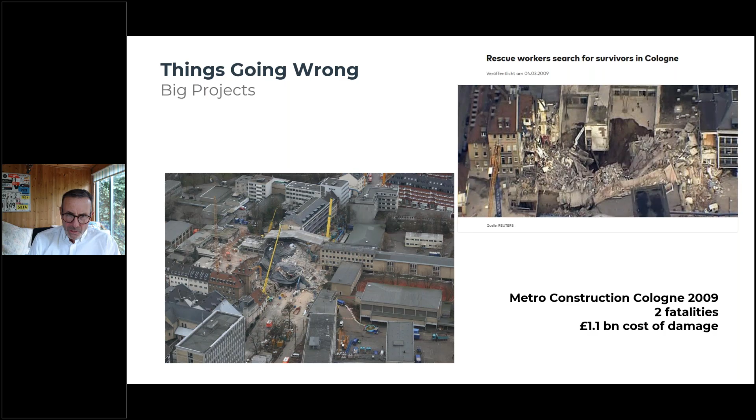The report that was published certainly in the UK engineering press in recent weeks, in this extract from Ground Engineering magazine, included the findings of an expert group who'd looked at that incident, and amongst their findings you can see here the #1 bullet point. Their recommendations in terms of future were that independent structural and geotechnical review is essential. It must include checking of the design and the supervision, and it must include monitoring of the execution of the work. So monitoring was concluded from that disaster as a way of mitigating the risk in the future.

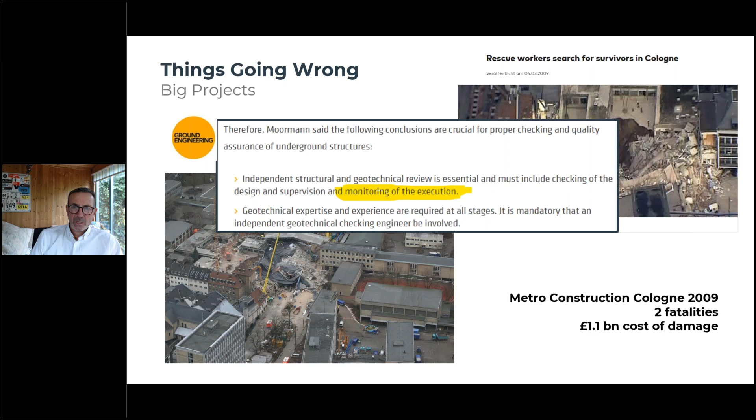And it's not just on these really big civil projects that things can go wrong. People with much healthier bank balances than me are spending a lot of time and a lot of money enlarging their particularly London residential properties. They're building big basements, they're burrowing below their terraced houses and building cinemas and swimming pools and all manner of other fine recreational spaces underneath the buildings. And a number of these, quite a significant number of these projects have gone wrong, even in residential projects.

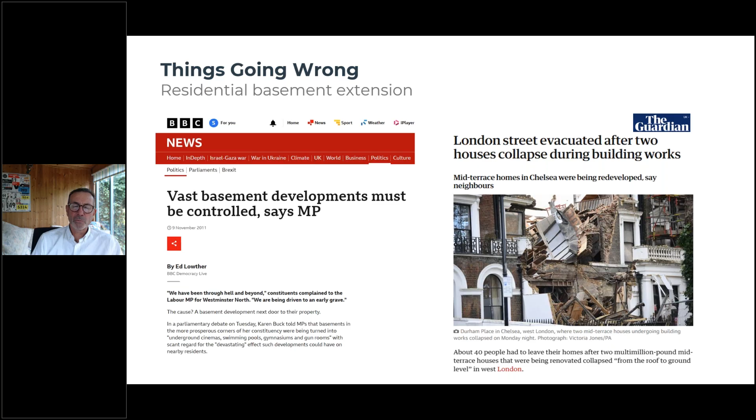The example here in the Guardian newspaper is one where it goes particularly wrong, because it brought down 2 adjacent houses. So again, monitoring is not going to stop that kind of rather foolish activity, but it could identify the problems early enough so that the work could be stopped and the measures could be taken.

I think the argument for monitoring is not just about stopping things going wrong, it's also to encourage things going right. If you take the example of the use of the observational method in terms of construction, for those unfamiliar, this involves a continuous cycle of design, construction, monitoring and review. It's particularly suitable for complex geotechnical conditions because it allows for modifications based on actual observed behavior rather than relying solely on initial predictions and modeling.

But the approach is really only effective when it's supported by robust instrumentation and monitoring systems that can provide virtually real-time feedback, real-time data. It's got a pretty long record. It's been used successfully on projects going as far back as the Channel Tunnel between England and France. It's used extensively on the Boston Big Dig project in the US. It was used on Heathrow Terminal 5.

As you can see from this example, it was used quite a lot on the Crossrail or Elizabeth Line railway built in London, opened recently. In just one of the many sites it was used in, the Western Ticket Hall construction, a review concluded that it enabled an entire level of temporary support struts to be omitted, that it had saved over £700,000, and that it had reduced the program by 4 weeks. So the benefits of a real-time feedback loop allowed smarter construction and engineering practice and brought considerable cost and program benefits.

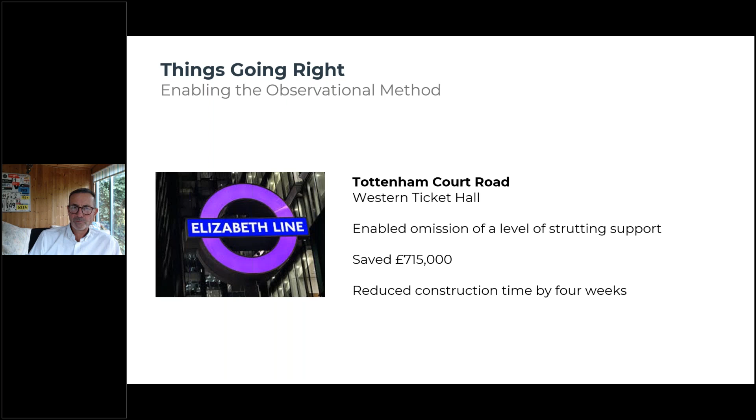When it comes to monitoring, the toolkit of instrumentation and monitoring hardware is bulging. It's been gradually filling up over the last 100 years or so. It ranges from relatively simple instruments, such as a telltale crack monitoring device—we're pretty much all familiar with them—temperature sensors and various other simple analog devices, ranging through to much more complex and capable automated devices like the automated motorized total station in the central picture.

But the lists are long, both for structural and for geotechnical monitoring. Most of these techniques need a person on site to take a reading, so sampling tends to be relatively sparse or infrequent, and operational cost is relatively high. The industry is therefore moving more towards automated monitoring options such as the AMTS.

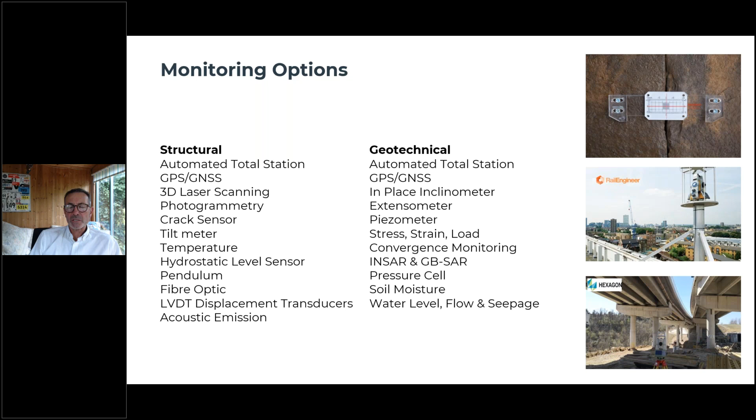These provide precise data, absolute data from many, many points. They're widely accepted and therefore used extensively in the industry. However, they are expensive in terms of the hardware, they need a fixed power supply, they need a line of sight, they have an annoying tendency to be stolen, and they're not necessarily the right tool for every site or for putting onto every corner of every site.

That's why the sector has looked increasingly at wireless options, not necessarily as alternatives, but as complementary options. Wireless technology involves the use of many dispersed sensors. They're generally smart devices, often able to self-configure, to self-heal, to respond to site conditions—for example, increasing the sampling frequency if they detect something interesting. Like a lot of IoT kit, it's generally fairly cheap, simple hardware, simple to use, and it doesn't need a lot of maintenance over a long multi-year lifetime.

So if we take a little tour around a typical construction site, we can see geotechnical data coming in from piezometers, inclinometers, extensometers, relaying that data to a cellular gateway. We can see temporary works like a crane base being monitored, the structure, the weather data being monitored from the tower crane, the props and the beams in the excavation being monitored for load, for strain.

And tilt beams looking at movement across the excavation. We can see the retained wall in the background there being monitored with crack sensors, and the tunnel below the site being monitored for convergence monitoring, to look at any changes in shape, any deformation caused by the excavation nearby. So that's a kind of whistle-stop tour around a construction site, and we can see just some of the common applications where you might use this wireless technology.

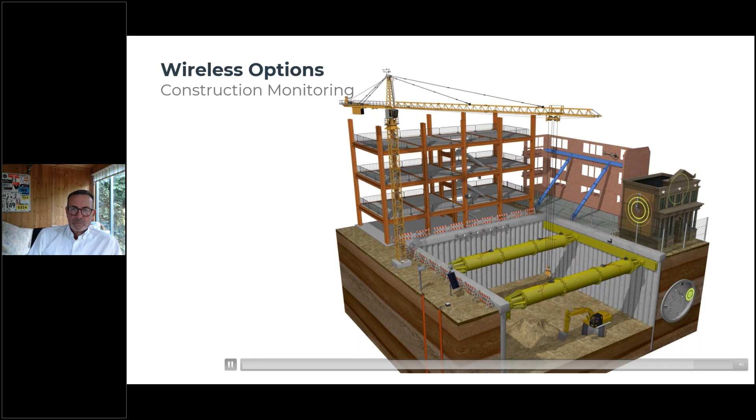So what happens after that? There is a fairly common thread to the pattern of wireless data flow, whether it's collected from one of the two platforms that Senceive offer—one of which is a mesh system we call FlatMesh, where you have a mesh of sensors, for example tilt nodes, which relay data to each other and back to the cellular gateway.

Or whether you use a longer wavelength point-to-point system, such as what we call GeoWAN, which uses the proprietary LoRaWAN communication network to provide long-range monitoring, many hundreds of sensors per gateway, but not quite with all the smart features and interactivity that you get with a FlatMesh system. Regardless of that, both systems will send data via a cellular link or an Ethernet connection to a platform called SenceiveIQ, that allows the user to interact with the data flow, to manage the data flow, and also to manage devices in the field, to change configurations, alerts, thresholds, and so on.

It also gives a choice of what happens next: whether that data simply goes to the default Senceive data visualization platform called WebMonitor, that allows users to interact with or monitor the system health, to look at things like battery levels, to visualize the data, do some calculations, look at graphs, look at patterns over time, and manage alert thresholds and who gets those alerts. Alternatively, from SenceiveIQ the data can be routed out to a third-party data platform so that it can be viewed with all that other data you might have coming in from your site, from total stations, for example.

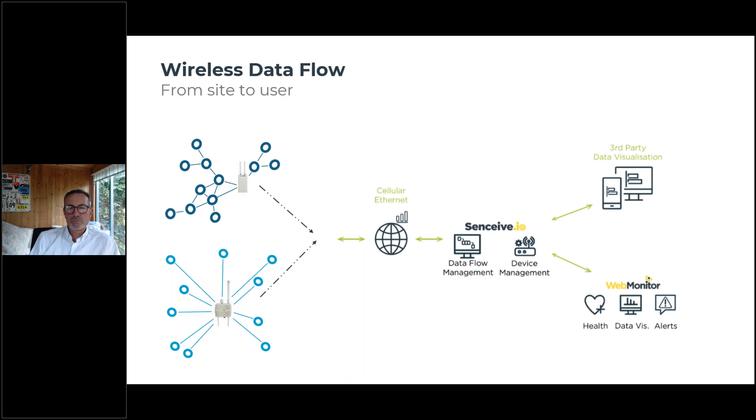So, in a nutshell, that's the overview of the platform and how it works. I just wanted to spend a little bit of time looking at some projects where users have found different ways to take advantage of this technology on some international projects ranging from big to small to medium.

The first of these is definitely in the big category. Sao Paulo, Brazil, population 12 million, growing extremely fast, with a very clear need to improve public transit. The metro in Sao Paulo is being strategically developed and expanded. The Line 6 expansion involves 15 stations under construction, a railway of 24 kilometers length, and it is one of, if not the biggest projects going on in Latin America right now.

It's had a somewhat checkered past, somewhat over schedule, over budget, maybe a familiar story for many big civils projects. In 2007, not on Line 6, but elsewhere on the metro construction project, there was a disastrous collapse. A sinkhole formed over an excavation, resulting in the death of 7 people. It destroyed 90 buildings, and the constructors were fined $48 million. The contracted team, including Alstom, were banned from bidding for government contracts in Brazil for over 5 years. Those sort of consequences are very much in the to-be-avoided category.

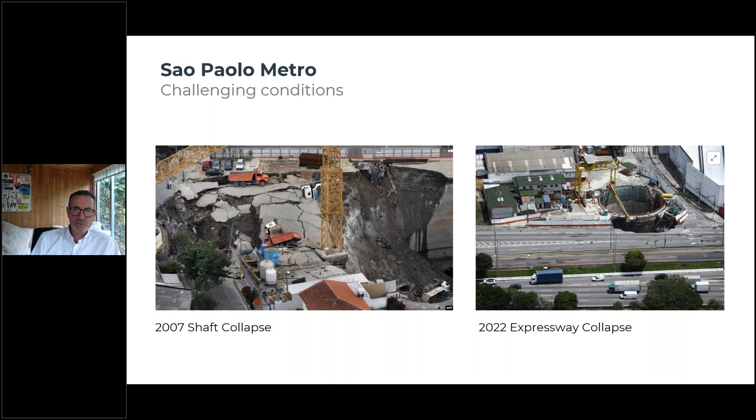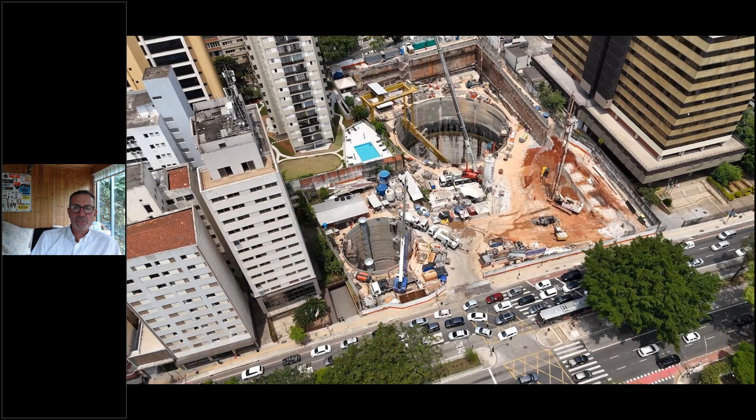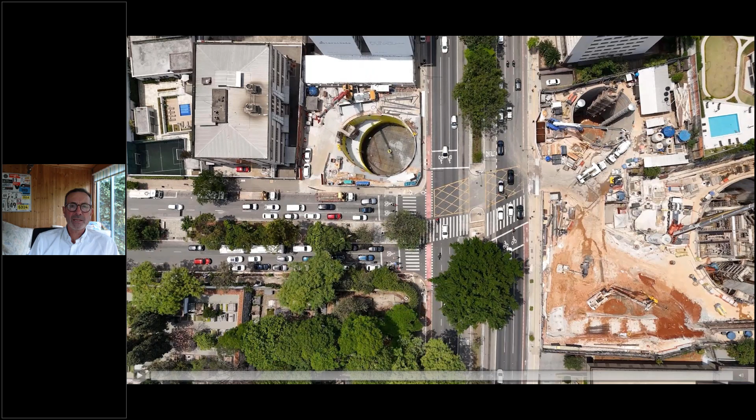If we look at the site, there's some rather funky drone footage here which illustrates just how congested, how complex, how complicated this project is in terms of the shafts and station boxes being built alongside high-rise buildings, busy highways, roads, and bridges—very demanding civil engineering construction conditions. Obviously, with that history of collapses in the past, there is a very clear need to tread carefully going forward.

So there is a very robust monitoring program in place. It comprises a combined approach with a lot of geodetic instruments, in partnership with a lot of wireless systems. You can see in the pictures here an AMTS looking at prisms on existing buildings in the zone of influence. We've got extensometers and inclinometers in use, and obviously piezometers and all the other geotechnical borehole logging you'd expect from a site like this.

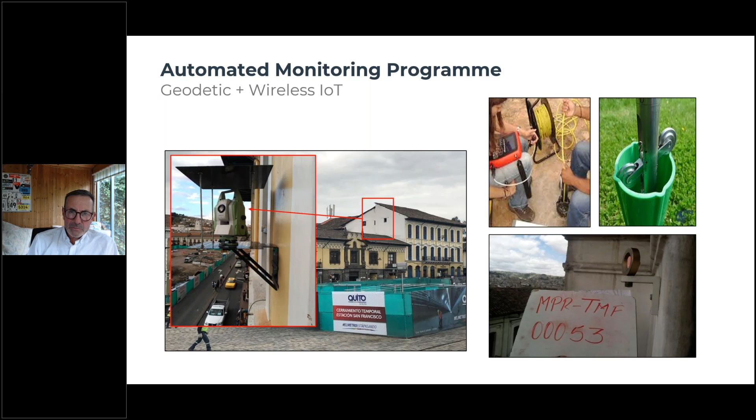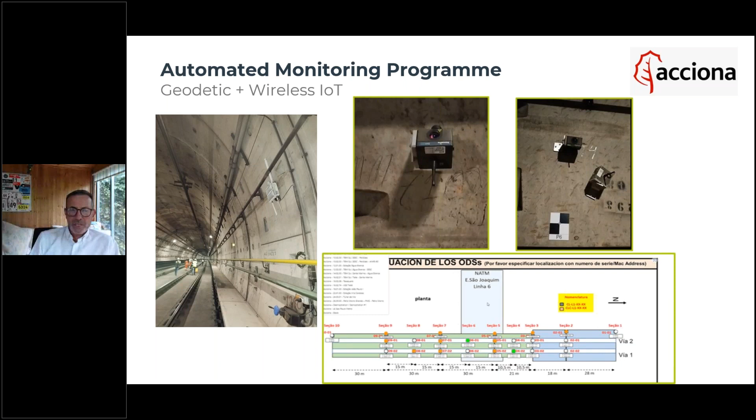Below the ground, the newly constructed tunnels are being monitored carefully. You can see here some Senceive optical displacement sensors set out in an array to monitor convergence, set out at roughly 20 centers through the tunnel, to look at any deformation happening—particularly where that extends to existing tunnels.

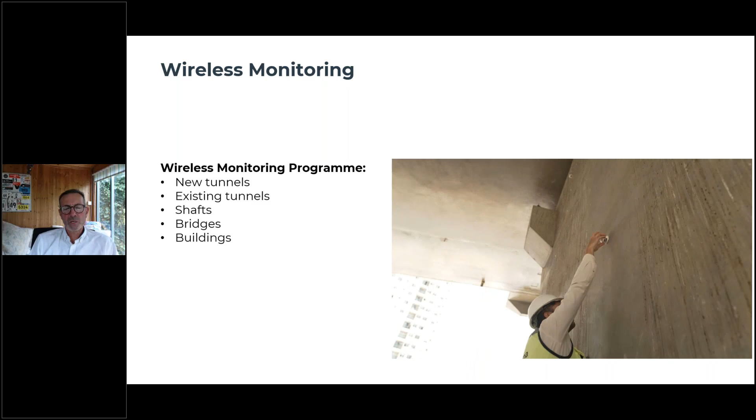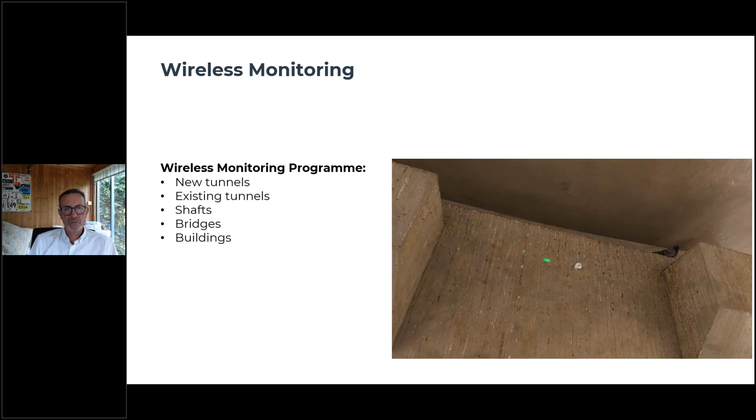The new metro lines are going within a few meters of existing tunnels, so they're being monitored. The shafts are being monitored with tilt sensors and optical displacement sensors. The bridges are being monitored, and the existing buildings in the vicinity are being monitored. You can see some of that activity happening here, and some pigeons who are seemingly not impressed with the magnificent technology just being put in place.

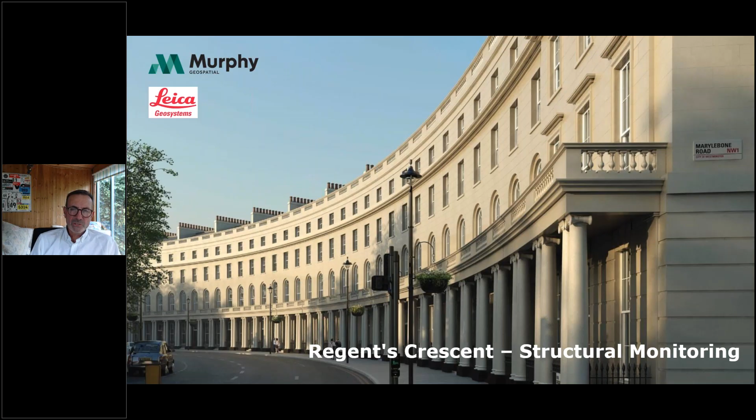So moving from Brazil to central London, this is another tunneling project. It may not look like it here, but this is Regent's Crescent, a grade 1 listed building in central London, built in the 1820s. It suffered bomb damage in the Second World War and was rebuilt. A scheme was in place a few years ago to demolish the existing structures while retaining the listed protected facade at the front, and to expand the accommodation behind that frontage.

It involved excavation of quite extensive new basements, which would be very close to London Underground tunnels—2 sets of tunnels. Users here were an expert company, Murphy Geospatial, a London-based survey and monitoring company, and they used a combination of technologies to do a fantastic job on this project of helping manage some really significant challenges.

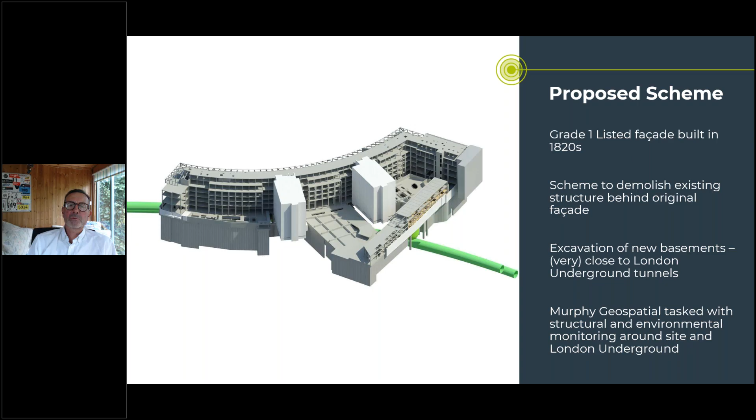Those challenges become clear if you see the proximity between the proposed foundations of the buildings and the existing tunnels—very, very close, within less than a meter I believe, the foundations were going to be of the existing tunnels. On the right, the picture shows both prisms from a geodetic system, and next to them a series of tilt sensors looking at movement within those tunnels during the excavation and construction work.

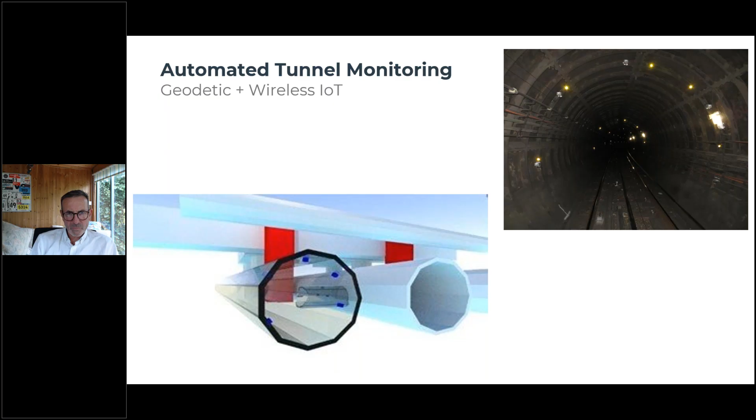So it's a really complex site, a sensitive project for many different reasons. The solution taken here involved multiple total stations used on a live demolition site, in close proximity to existing construction plant, with a lot of demolition work going on. They used more than 250 FlatMesh wireless tilt sensors in the Jubilee Line tunnels, as we just saw, connected to the surface with fiber optic cable to get the data out, along with a combination of monitoring in the adjacent Hammersmith and City Line tunnels.

There was quite a lot of clever thinking in the background. Some completely new algorithms were developed to calculate deformation, heave, and settlement, both to model it and to look at the actual movement during construction. The whole thing couldn't really have happened without the real-time data, referring to the observational method being managed remotely and used to inform the construction team and stakeholders, the local residents, local highway planning authorities, and London Underground, that this extensive demolition, excavation and construction project wasn't going to cause harm to others, particularly to the London Underground network.

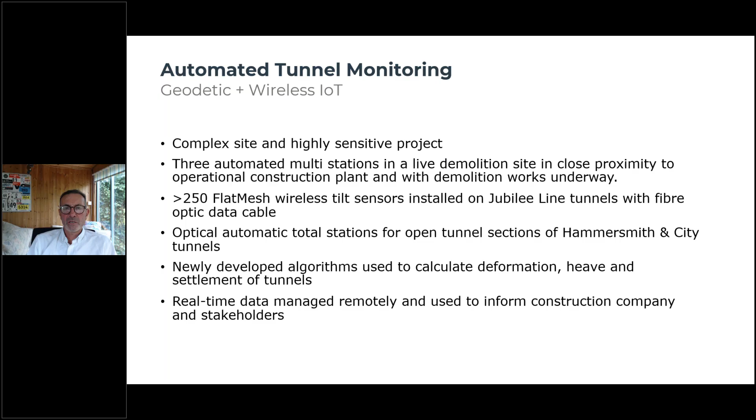You can see here a sequence of readings presented. On the left, this chart shows movement of the northbound tunnel from the tilt sensor data, spanning the period during which the existing buildings were demolished and the excavation of the new basement was made. On the top left, you can see the blue zone where nothing has happened, no construction activity has occurred, and no movement has happened. As we span across that 5-month period, we can see gradually it moves through the yellow and orange color scales to red, and the northbound moved maybe 2 or 3 millimeters, and the southbound moved vertically upwards.

It heaved over 4 millimeters, but that was considered within the predicted limits. It was considered to be a manageable level of movement, and because the data were coming in consistently and virtually in real time, it was felt that was a managed process, and the work could proceed because people were able to get their finger on the pulse, as it were, based on these data.

Interestingly, I think it was said after this project that nobody could think of any project that's taken place in London where anybody's been permitted to build so close to existing London Underground tunnels. London Underground would never have allowed that without access to this data, and it was only really possible that project could go ahead based on the data that this system provided.

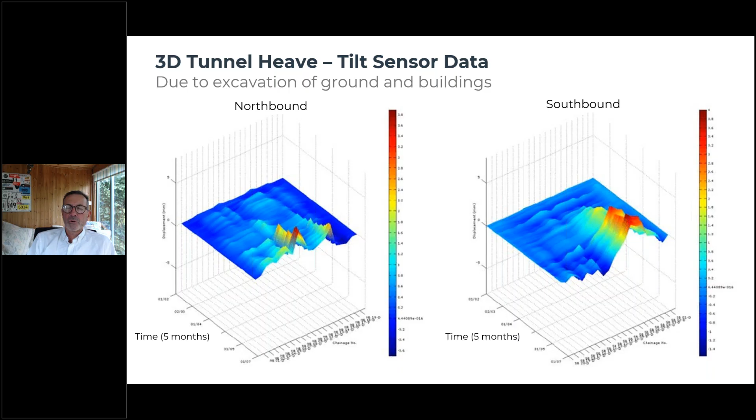So hopping over the North Sea to Germany, this is in Frankfurt, moving away from tunneling and going up rather than down into the ground. This is a project, again, a fairly common kind of application for monitoring. It's monitoring the facade of a historic building where the main core has been removed and a large high-rise building is going to be built within the core of this facade.

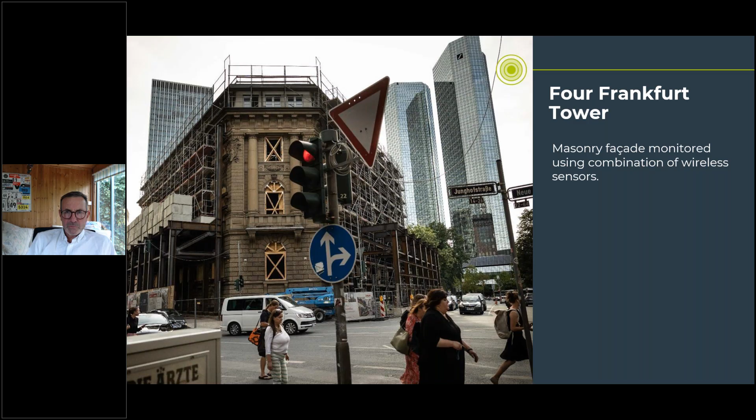A whole range of monitoring took place here, but I think you can understand the advantage of a wireless system in the sense that it was possible to mount these small, robust sensors. You can see a tilt sensor at the top, one of these little devices, and a crack or joint movement sensor spanning over this stone entablature - this stone joint - to look at the movement across the joint. It's a pretty difficult spot to get to. You don't want to be going back there all the time.

The batteries in this kit will last for months, for years, certainly throughout the construction project's lifetime. So the advantage is it's pretty quick to put it in there. You're going to get virtually real-time data, and you don't need to keep nipping back up a tower, a scaffold tower, or renting in expensive access kit to reach that point.

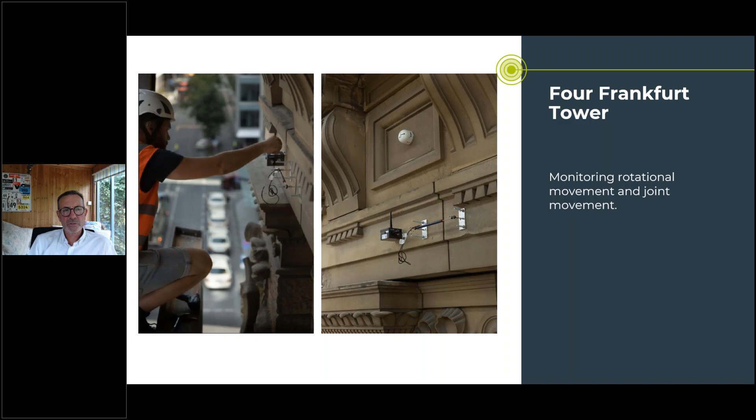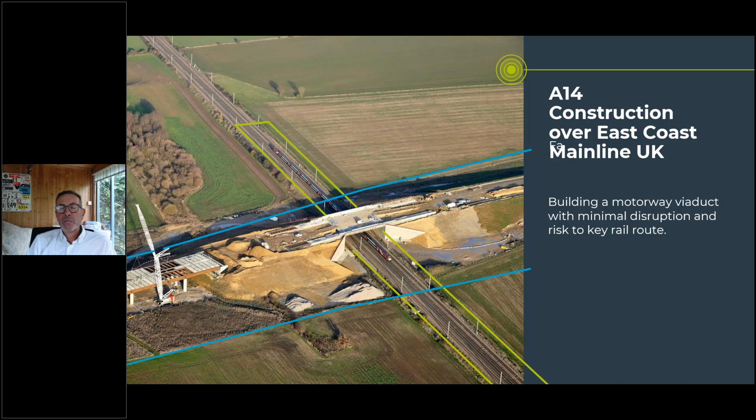Railways are particularly susceptible, for obvious reasons, to movement caused by adjacent construction activity. Track geometry is critical to safe, efficient running of a railway, and many projects around the world use this technology where there is excavation, piling, foundation work, or under-track crossings planned in the vicinity of the railway. The advantage, again like the building in Frankfurt, is that you can nip in there quickly in an overnight possession. You can install it and leave the kit, and it will get a whole variety of data on parameters such as track cross level, track twist, and an indication of relative settlement due to activity.

That construction of the A14 viaduct took place over a period of probably between 1 and 2 years, the duration of this monitoring project. The kit could have stayed in place. Some users decide to leave it in place to take a more long-term monitoring role after the project, but in this case it was removed. It could be used elsewhere.

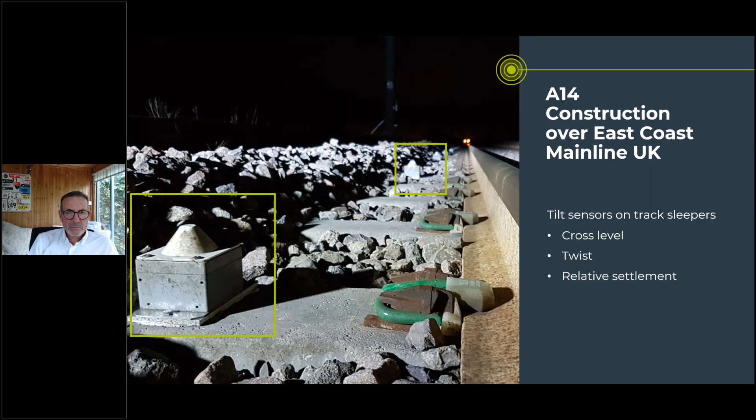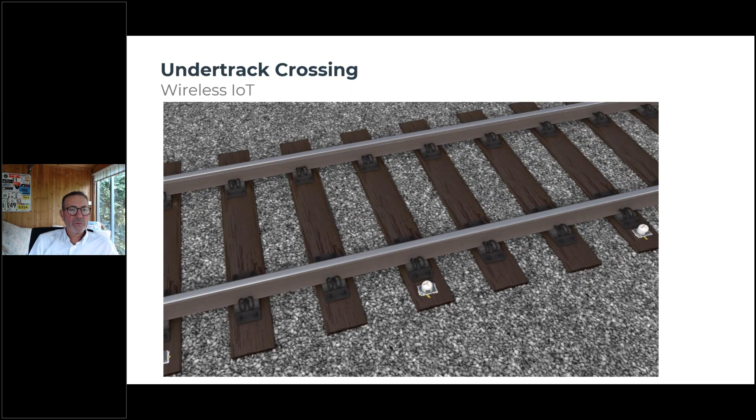So that's an example of monitoring of a railway where there's construction activity above the track. A common, possibly more common application is where activity is happening below the track, under track crossings. Things like pipe jacking are becoming increasingly common because they allow work to happen without stopping the trains. This little animation portrays the benefits of this approach quite easily.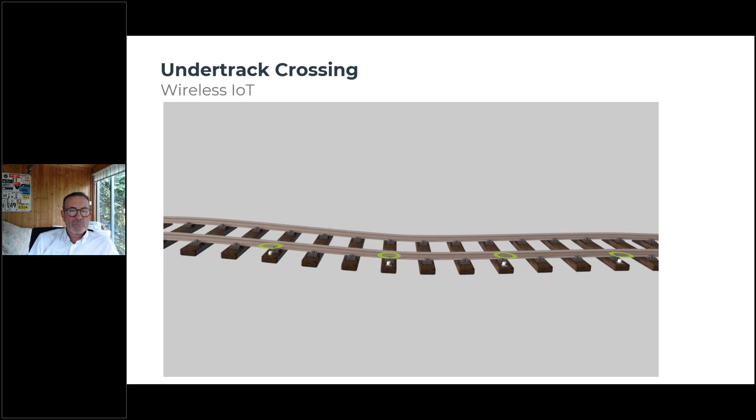Again, installing the sensors on track sleepers, the construction activity, the excavation is taking place. Relative indication of settlement, or changes in other track geometry parameters like twist, can be monitored virtually in real time as that activity is happening.

Measures can be taken: the work could be slowed down, ground freezing could take place, grout could be injected, trains could be slowed down. So if somebody smart is looking at that data as it comes in, there's a whole range of different options opened up to mitigate the risk based on the monitoring data.

I think that's a fairly useful place to finish this brief tour, because that's a fairly common set of advantages that run across the use of wireless monitoring in construction. I'd like to think I've portrayed some of the advantages here, that it's a system that can provide virtually real-time, virtually continuous data, and how that can benefit construction teams, how it can provide automated alerts.

So that people will be made aware of a problem, that it doesn't need a line of sight, so that if construction equipment is being moved around a site that could obstruct a geodetic survey, that will not affect a wireless system. Because it's pretty quick and simple to install and doesn't need a lot of maintenance, it's something that will save labor.

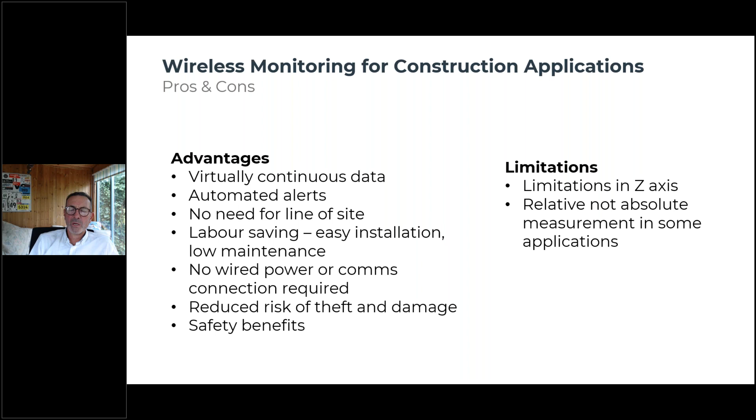There is still very much scope, I think, to see it as a complementary tool to techniques like total stations that can provide absolute measurement. There is still very much scope to see these things used as a sensible partnership rather than as alternatives.

So that pretty much rounds up what I wanted to cover today. I could talk for several hours on this topic, but I'm supposed to stick to 30 minutes, and I think that's pretty much wrapped it up. So over to you, Amna, to see if there's any questions.

Yeah, we've got a couple through. Let's have a look. So the first one is, how easy is it to move kit around a site as construction progresses, or to take it from one site and reuse it at another?

Yeah, that's a good point, actually. If you take the example of monitoring the progression of a tunnel, quite a common application is to monitor movement of precast segment linings. Teams doing that quite often will monitor near the tunneling face, but as settlement and movement become minimal after construction, they simply take those tilt nodes off where they're mounted and move them forward within a matter of days of their first installation.

As the TBM, tunnel boring machine, moves forward, the nodes are simply moved forward, you jump into web monitor, change the configuration for the location details, and that can be done really pretty simply. That approach, I think, is modeled and replicated elsewhere. Construction sites, tall buildings go upwards.